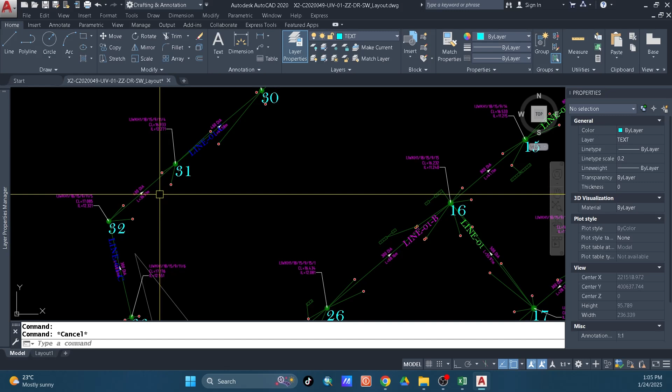For example, we have a manhole here: manhole name, cover level, invert level. All the data regarding manhole is showing in AutoCAD, and we have to export it to Excel file using Lisp application.

First, we have to upload, using the APPLOAD command. We have to upload the Lisp application. Let's look for that one.

This is text to column. Just load this and close. Don't worry, I will put the link of this application in the comment section below for you to be able to download.

Since we already uploaded that one, use the command, then text location. For example, we put it in the desktop, and then this is the file name. Okay, and then next.

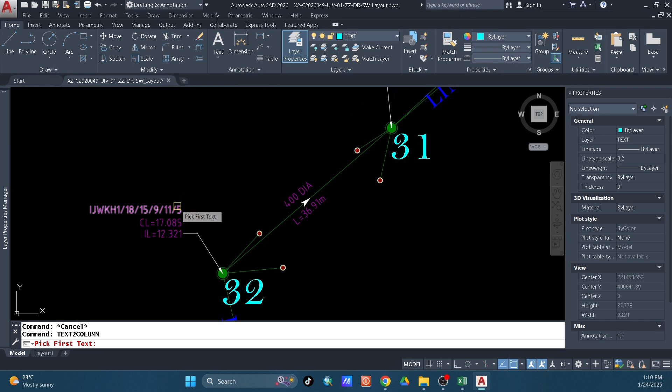Text to column. First you have to select, for example, manhole name, cover level, invert level, and the pipe length. It's important that the sequence is the same for the next text that we have to pick.

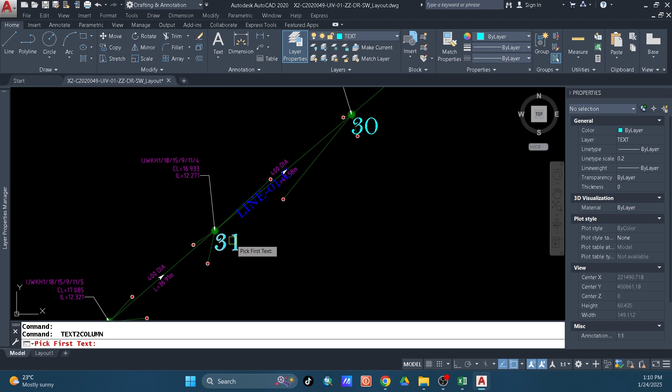Again, same, pick first manhole name, cover level, invert level, and the pipe length. Next, and so on and so forth. Since this is a tutorial only, I don't need to do it all, I just show it to you.

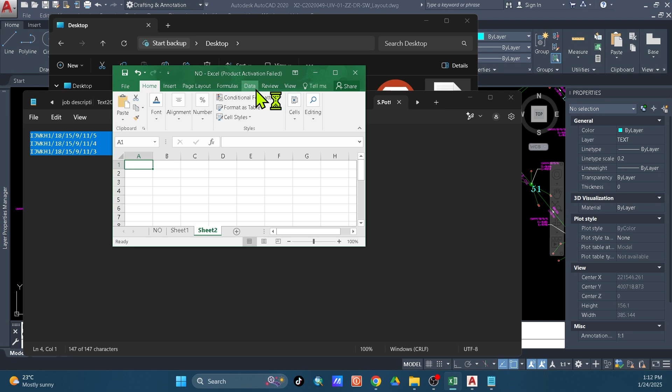Let's go to the file, which is this one. As you can see, this is the manhole name, cover level, and invert level. We have to just copy it to Excel file and then paste it. So we already extracted all information of the manhole in the drawing to Excel file.

This is the first option. And then we still have another option, which is data extraction. The second option is data extraction, just command DX.

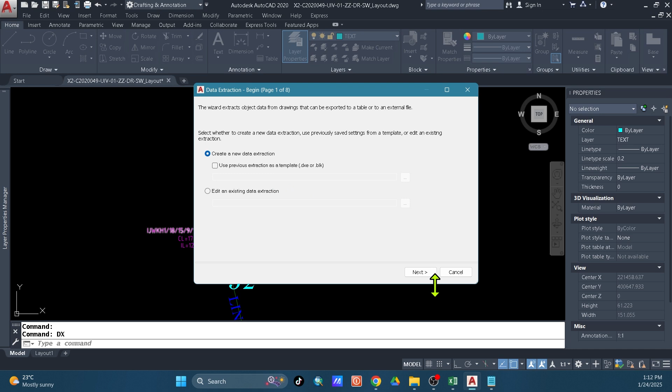Next, for example, let's save it in desktop, file name E, and then select object, and then you have to select all of this, for example this one. Enter. Next.

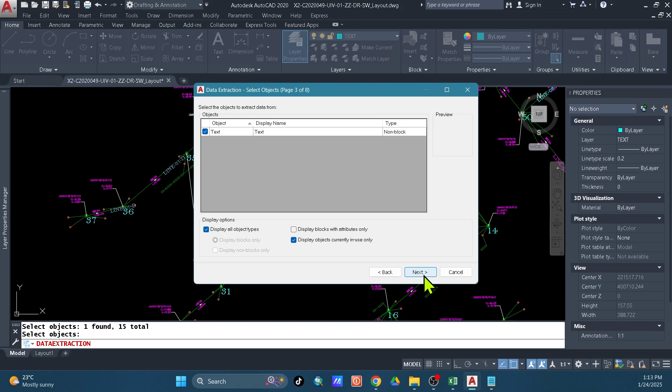Since we need only the content, if you need it all, you have to check it all - the author, the color, everything, you see it here. But since we need only the manhole name and cover level, you can uncheck this, and then the text, you remain only the text. Height, no need, we need only the contents and the value.

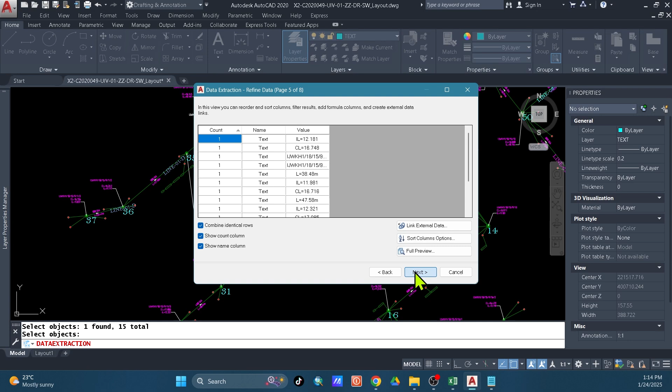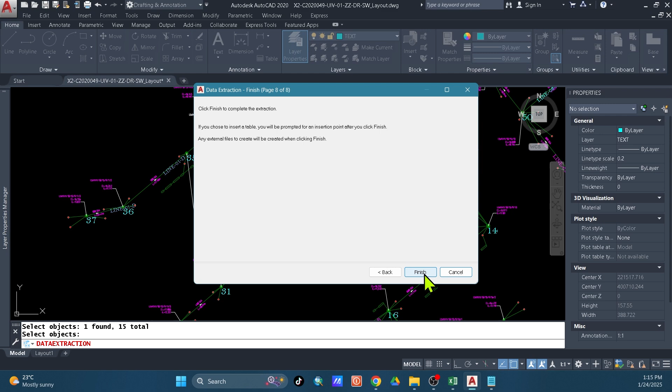Next, if you check this one, AutoCAD will automatically make a table for you, but we need only this one. The output is the Excel file. Let's go save it in desktop, which is this the file name. Save, next, finish, and then, which is this one.

So let's open this, and this is all the data that you need. It's already here, all you have to do is to arrange it. So it's up to you what process you want to use, either data extraction or the Lisp application.

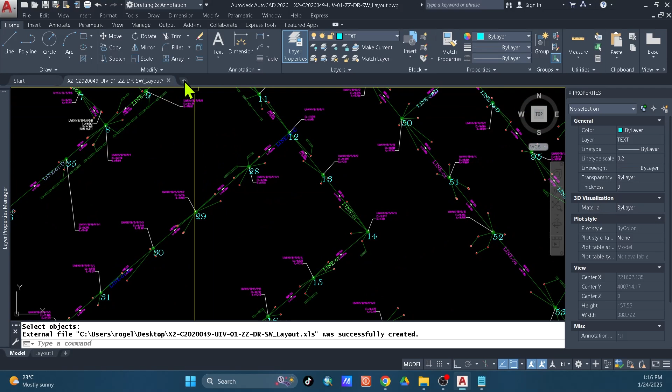But in data extraction, you have to arrange the sequence, while in the Lisp application that I showed you earlier, it's already arranged. And then the next tip in Excel in relation with AutoCAD is, for example, I will show you one thing. I will open one CAD file here, and let's say this is street lighting.

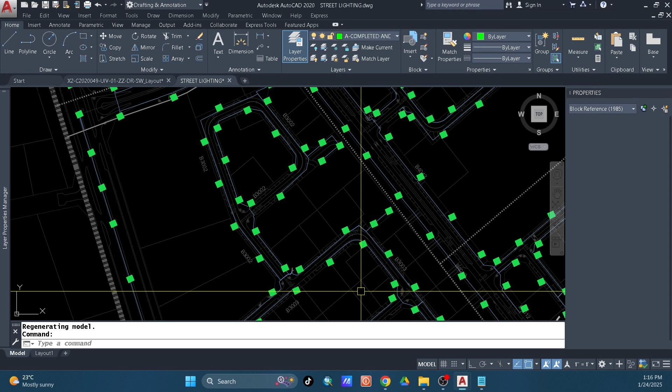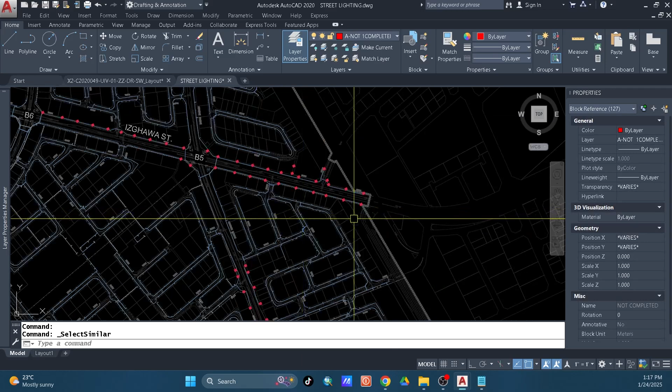For example, I will delete first this, I will remain one, erase - oh sorry, delete. I left one only because we will use that one later. I will delete this one also, and I will delete the layout.

I just want to show you how it works, the Excel file. For now, I will delete the layout because I'm using this for my work, maybe it's not allowed. Okay, I will delete this.

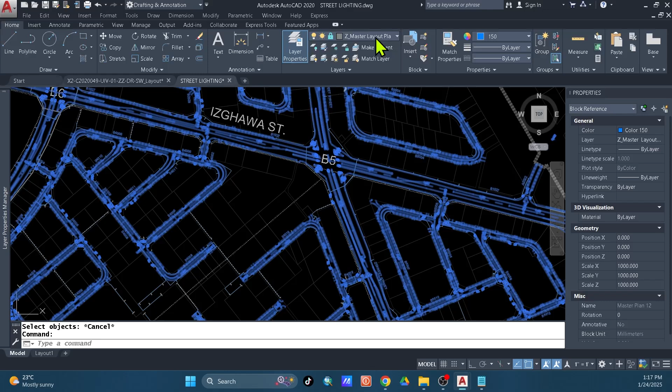What's important only is the coordinates, so we will delete first also. Oh, we'll delete it all. Much better.

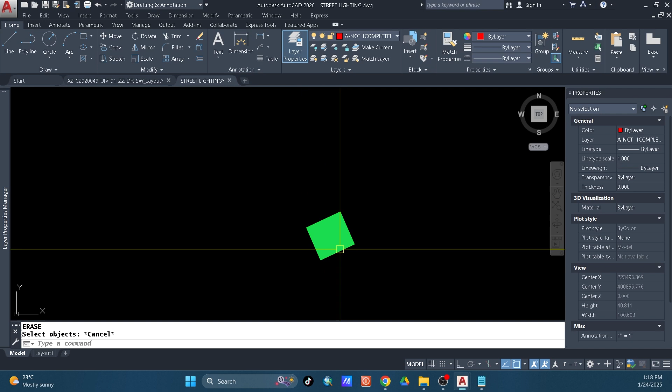So for example, I remain only with this block. This is a block, and it's important that you have a base point in your block.

We will open Excel file here. For example, this street lighting - oh, not this one. Okay, for example this. I will delete first, or let's say this is - we will retain only the coordinates.

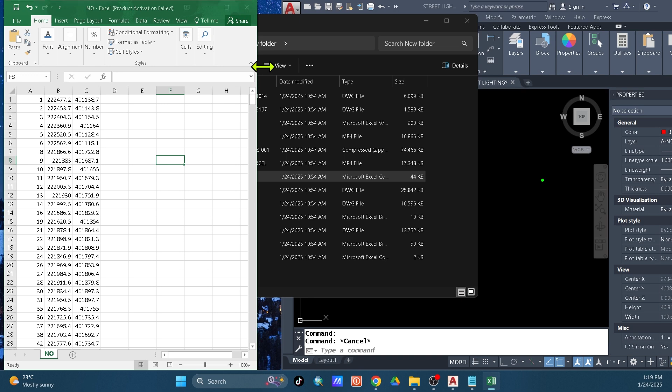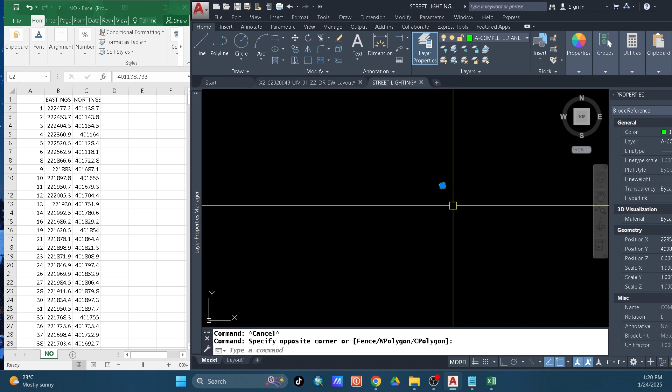Suppose this is eastings and northings, your coordinates, and then this block we have to put it in these coordinates in a fastest way. We will do a concatenate, equal sign in Excel file, click this and sign, and then comma, and then and sign, and this eastings and northings, and then drag it.

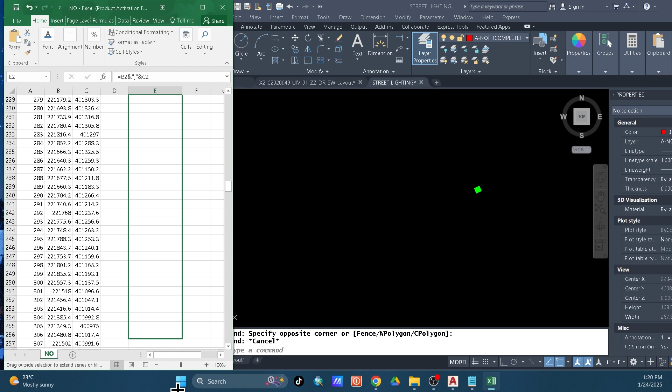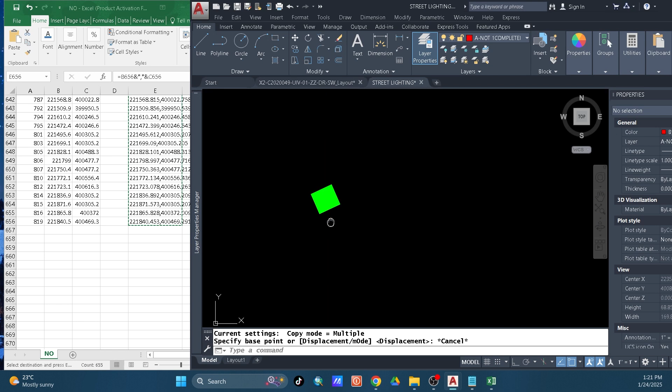Copy, just copy this, and then click the block, command copy from your keyboard, select base point. Oh wait, because the OSNAP is not on. That's okay. Okay, and then copy between 2 points.

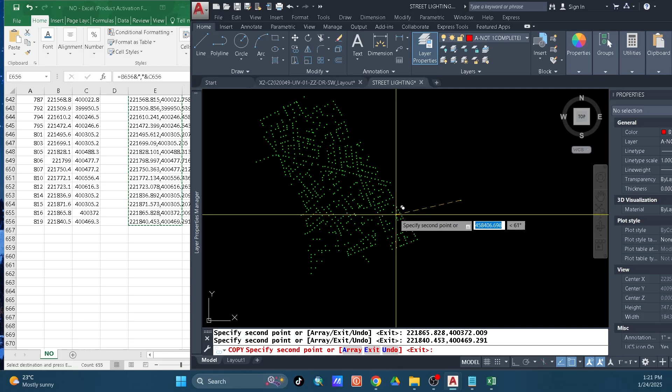And then paste. As you can see, it's automatic. Oh okay, I will repeat, I want to show you. Just copy from Excel file, copy, and then go to AutoCAD, copy command from your keyboard, select base point, and then paste. I want to show you how it works. So it's automatically put the block in the exact location according to the coordinates that we have in Excel.

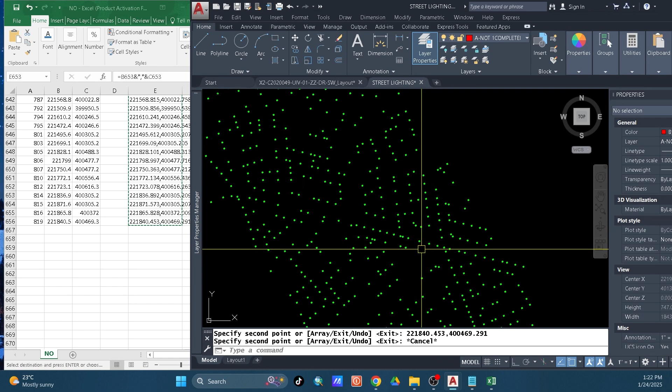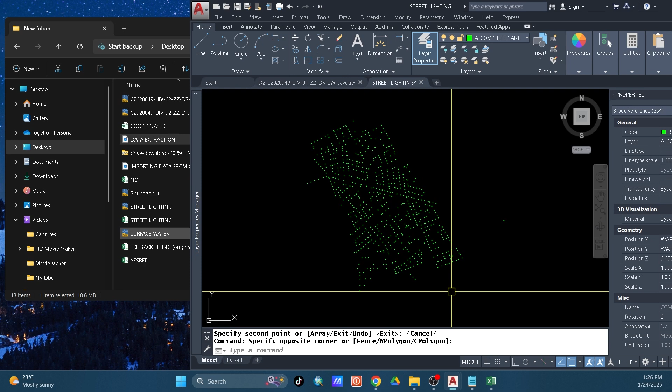Okay, and then what else? And one more, for example, vice versa. We will take all of this. For example, you have drawing and you want to get the coordinates of each block object. It's opposite of what we did in a previous row.

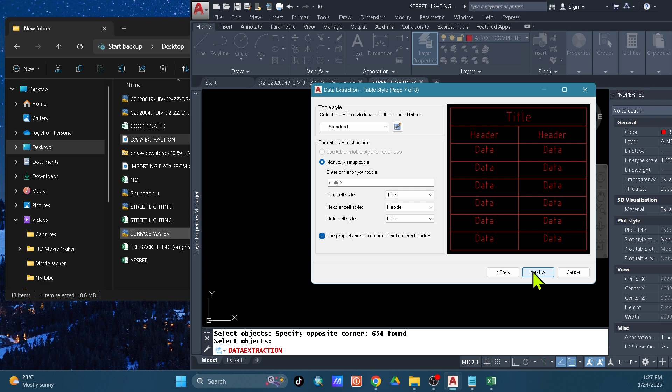So just select data extraction, same with data extraction, dx, enter, next. Let's say use this, same with data extraction, just click, next, and then next. Since we need only the coordinates, we check only the position x, y, and z. Next, next, save it in Excel. Oh, I will show you if you check this. Next, what's that? Next. So since we check the first one, you have a table.

For your coordinates. And then let's go to the output, the Excel file, which is this one. It's already here. No, not this one. Where's that? Desktop, we save in desktop. Okay, I will do it again just to show you.

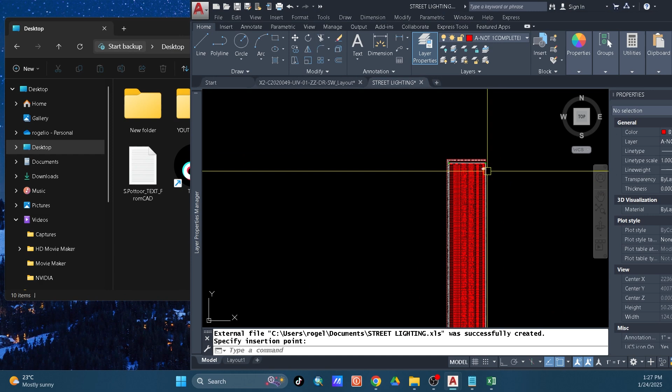Let's say dx command, next, or this is just a sample only. Select, and then next, and then we need only the geometry, which is the position of northings and eastings. We have to uncheck this. Next.

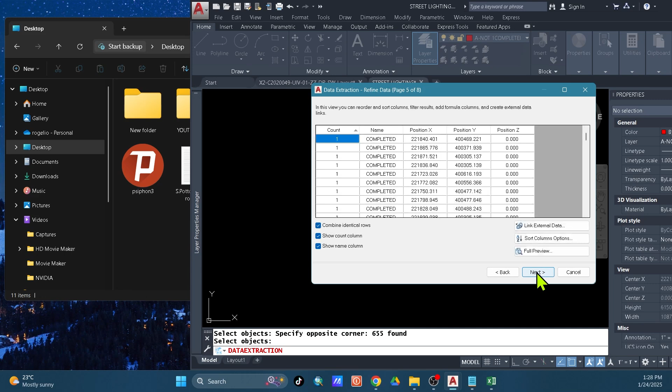We will just save it in desktop. Let's say, let's change the file name, save, next, finish, and then which is this one. So your coordinates is already here. It's the opposite of exporting, and that is the exporting and importing of data from Excel to AutoCAD and vice versa.

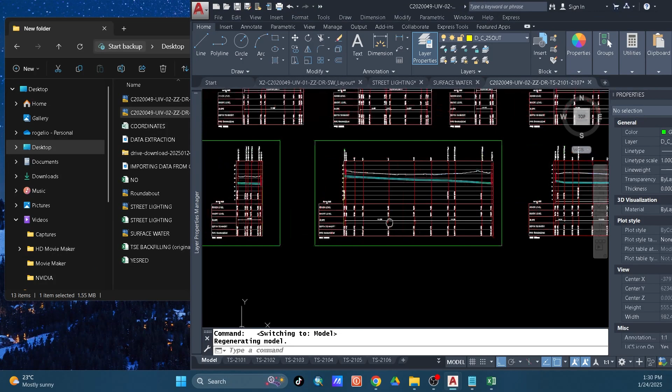And one more thing, there is another third option also of exporting data from AutoCAD to Excel. You can do this also. For example, we have a profile here of, let's say, TSE profile, and we have a chamber name, cover level, invert level, and the chainage.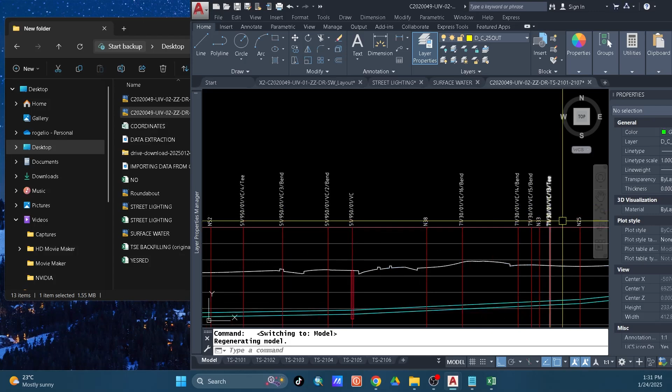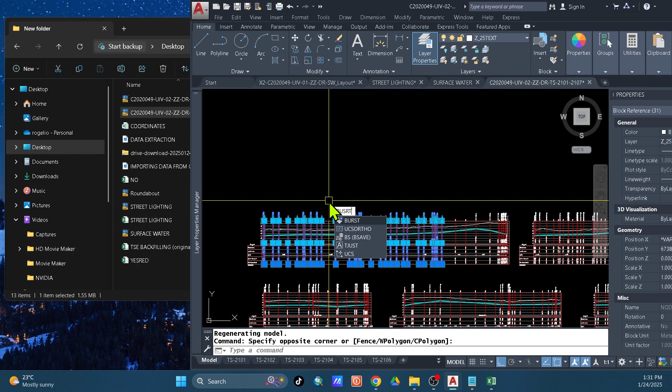For example, we have to take this data, since this is a block, we have to burst first. Command burst, the difference of burst and exploding command. If your block command is with the text attribute, don't use explode command. Much better if you use burst command to retain the correct value of the text that you have in a block.

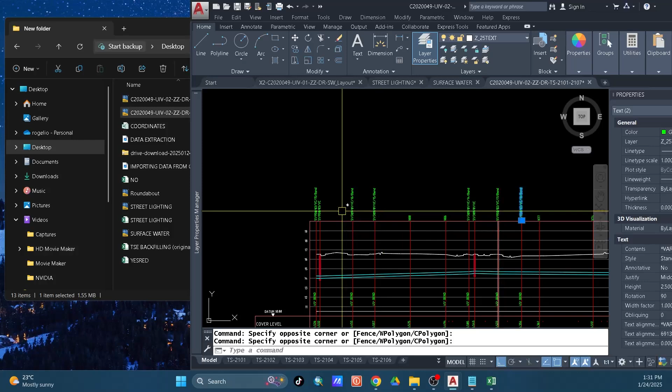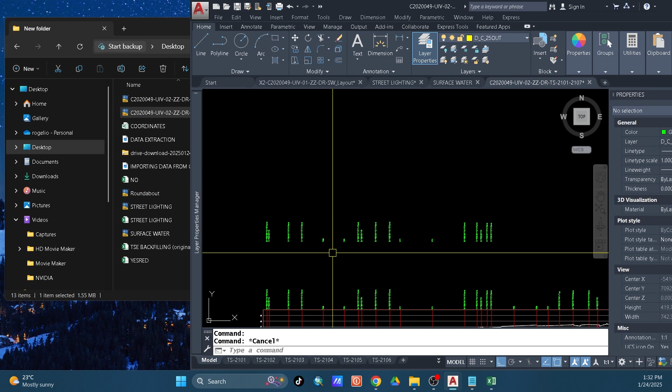So since this is a block, as you can see here, just command burst, enter, and then now it's the same. The value is still there, but it's not a block. So we have to take this, copy, and then convert this text to mtext, a combined mtext. It's important because when you export it to Excel file, if this text is combined text, the sequence is the same. But if you export it and it's not combined, the text will be.

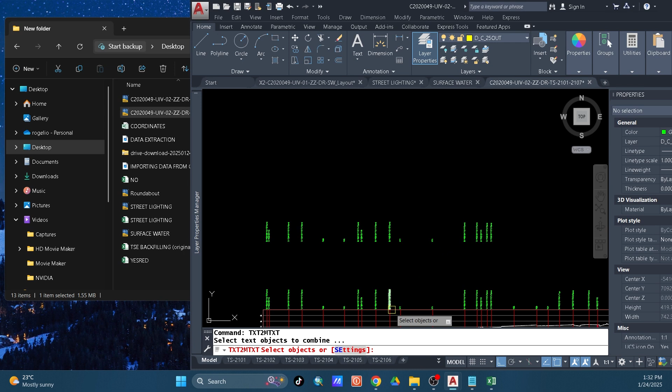Not in a correct sequence. Text to mtext, enter. So it automatically combined. But sometimes you encounter text to mtext and it's not combined. Just go to, after text to mtext command, settings. It's because this combined into a single mtext object option is unchecked. That's why you have to check this one to combine it. Select, enter, enter. So the manhole name is combined already, and then we will take the.

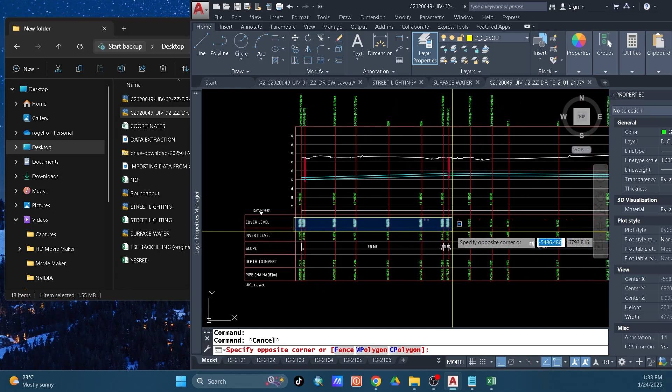Cover level. So we have to delete this. We don't need this.

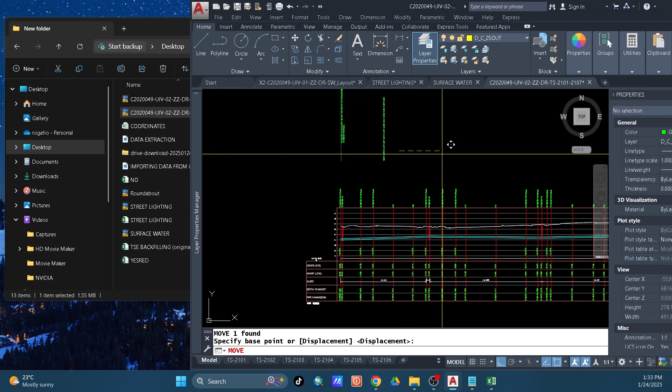Same procedure: copy, and then text to mtext. So it's combined already. We have a cover level now, and then invert level. For example, same procedure, text to mtext, enter.

And then we have invert level here, and then the chainage. We have to take the chainage. This is a third option. The first option I showed you is using the Lisp application, and the second option is data extraction, and this is the third one.

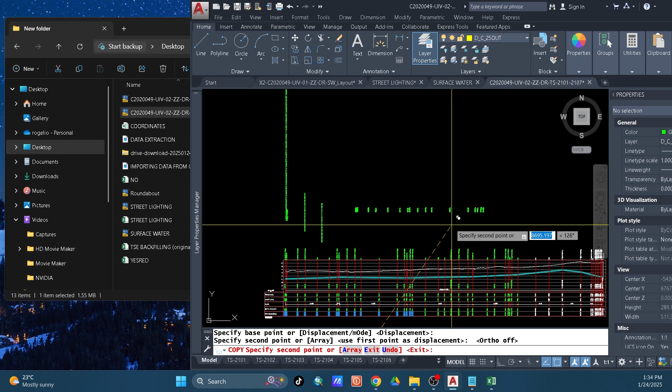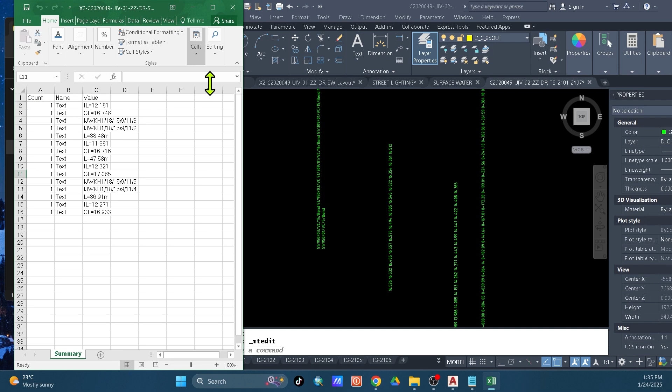Text to mtext. So in this mtext, we already have the manhole name, cover level, invert level, and the chainage. All we have to do is just copy it to Excel. Let's open Excel here, a new tab.

Just double click the mtext, then Control A, Control C, and then go to the Excel file and Control V. So since this is mtext in one object in AutoCAD, in the Excel file it's only one text.

So all we have to do is go to Data, Text to Columns, Next, and then Finish. So now it's separated into cells. We have to copy this, copy, then go to another cell, paste, right click, and then transpose. So we already have here.

Let's change the row height, let's say to 25 or 20. This is not included, I'm just doing this to make it more visible for you. So since this is a manhole name, we will put it here: cover level, invert level, and the chainage.

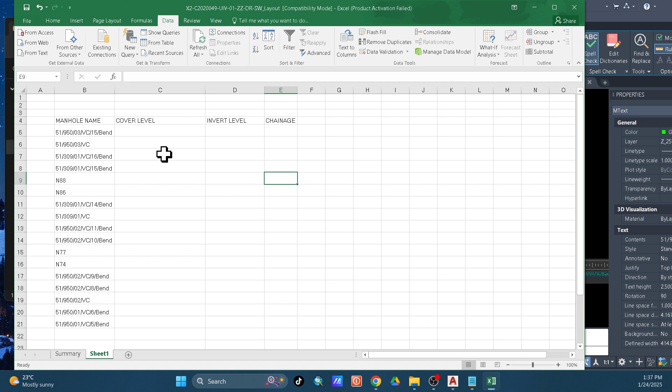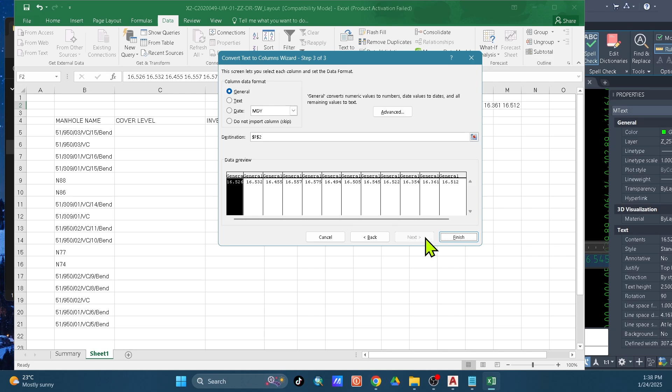So let's do the same for the cover level. Double click the mtext, Control A, Control C, let's go to the Excel file, Control V, and then under Data, Text to Columns, Next, to separate into cells, Finish.

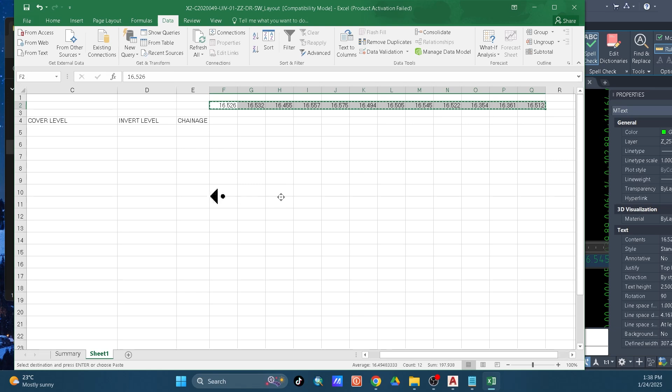This one, click the cell, Shift Control and then arrow, Control C, and then go to cover level, go to cell, right click, and then transpose. So this is the level.

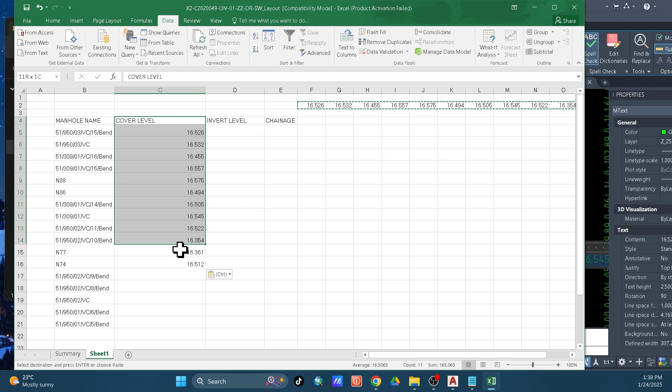So since we delete this, this is just a sample because I clicked more manhole names than the cover level, but this is the one, we will check it later.

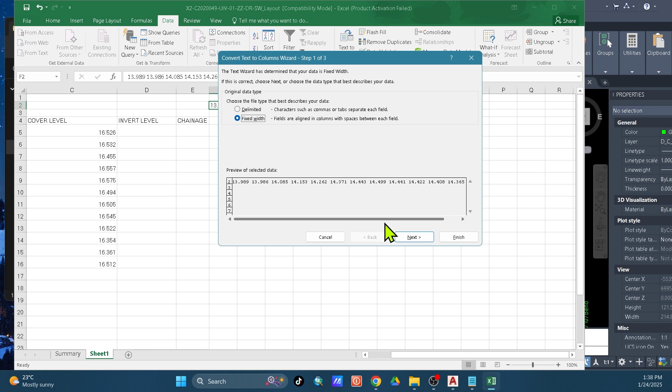And then same procedure with the invert level: Control A, Control C, delete this one, paste, same procedure, Next, Finish. Oh wait, transpose, and let's go to change, Control Z.

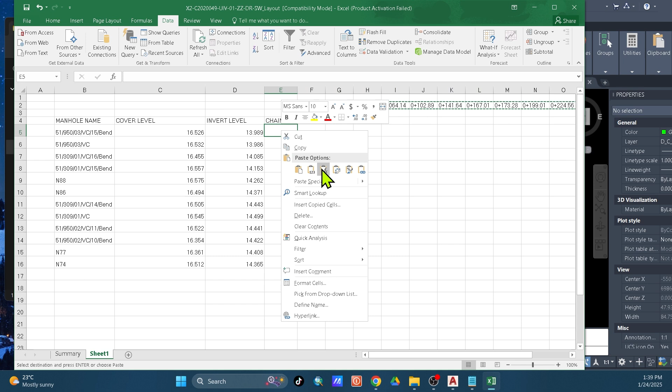This is just the same procedure. Next, Control C, and then the change, transpose. So as we selected more for the chainages, that's why if you check it, 51, which is this one, I'll delete this first.

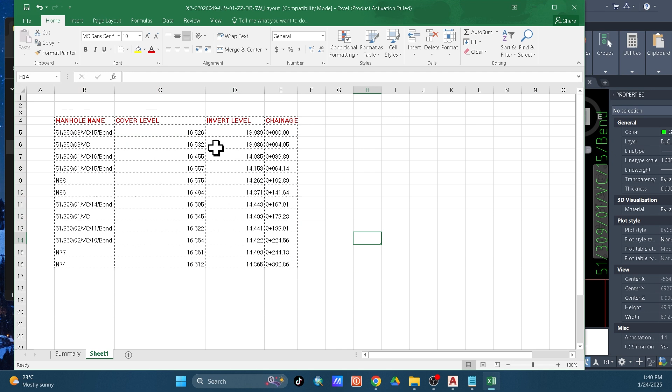51 950 VC, the manhole name, for you to see. And then the second manhole, let's go to cover level, 16.526, and then 13.989, which is this one, the invert level of this manhole name.

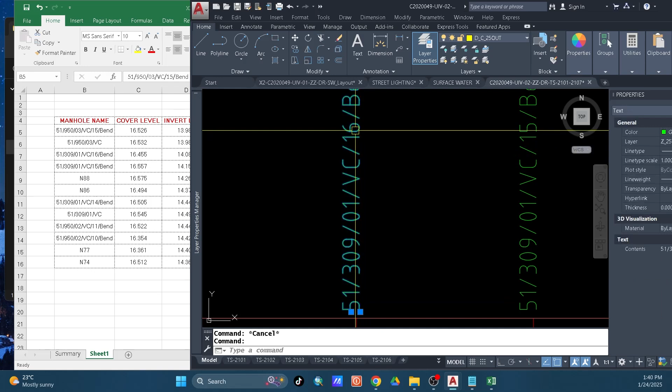And then let's go to, for example, this number 16, which is this. Let's go to cover level of 16: 16.455, 16.455, 14.085. And then this is the chainage.

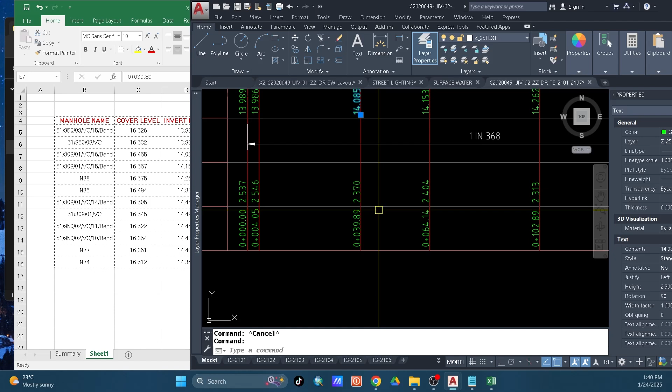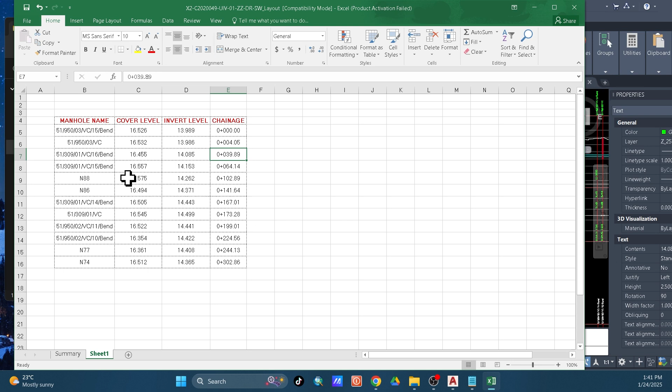This is the incorrect sequence, because when you export it from AutoCAD to Excel, you make the mtext combined. But if you do that and the text is separate, you have to arrange the sequence. This is important, why you have to combine the mtext of your text in CAD first before you export it to the Excel file. So for example, we have to take the length of this pipe.

So we will make the formula: equal sign, minus this one, so it's a value, because of this plus sign we have to remove that, we have to make it a number. Control F, plus replace all. Okay, close.

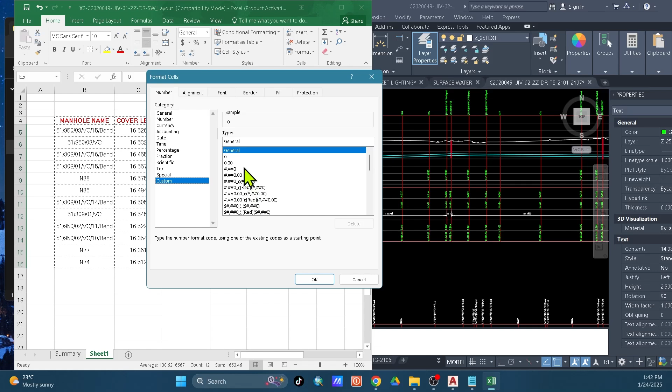So it's a number, but in presentation it should look like a chainage. So we have to format cells, go to Number, Custom, let's say this one, change it to 0 plus 0 0, enter. Okay.

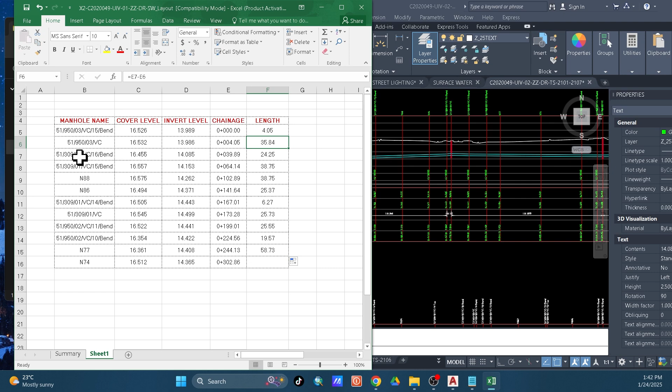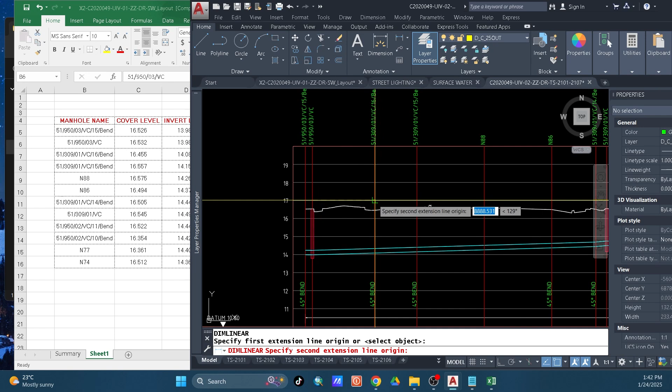So this is the length from this chainage to this one. For example, this manhole name, which is this VC 16, let's check the length: 35.84, which is 35.84. So that's all.